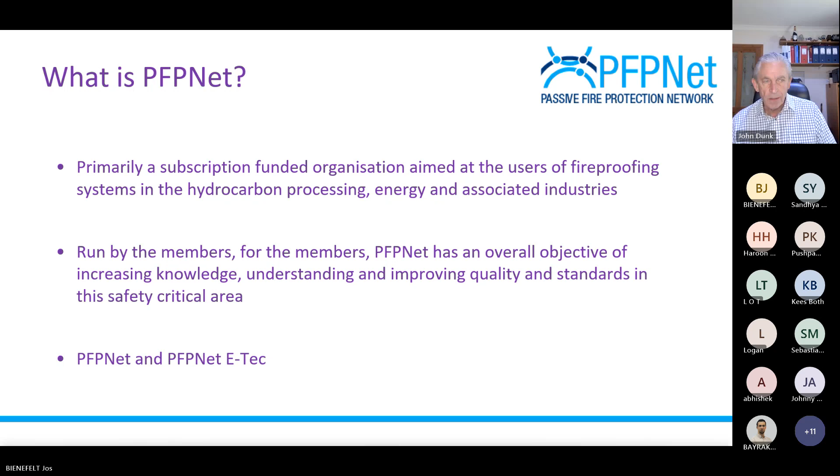Next slide, Jos, please. Recognizing the similarities between tunnel fires and oil and gas fires, primarily due to the severity of them, some time ago PFPNet formed a tunnels fire protection group, currently chaired by Kees Both of ETEX. The group has developed several documents addressing fire protection in tunnels, most recently the guidance document, which we are going to be presenting during this webinar.

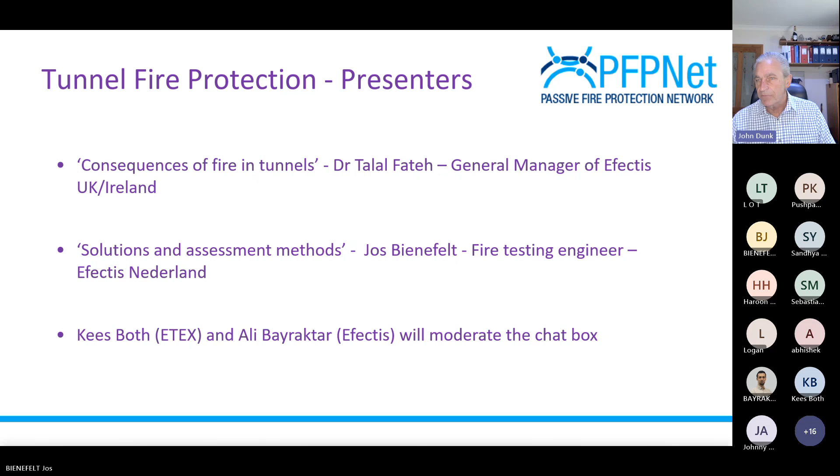Good afternoon, everyone. First of all, I would like to take this opportunity to thank John and PFPNet for the opportunity to present ourselves and also to present our work, the guideline will be presented by my colleague Jos later. To make it very easy, my presentation is very short. It will really be to introduce ourselves and also maybe to have the introduction for the second presentation, so I will not take a lot of time. I will try to do it in 10 minutes to give more time to my colleague and later for the question and discussion all together.

So if we'd like to start. I would like to take this opportunity to present ourselves, Efectis, and the story of this group. 20 years ago, a French research center, the Metallic Construction Institute, with the Dutch Public Research Center TNO, created a private company, named Efectis. This company is really dedicated to fire safety science. At the beginning, we were working to cover the requirements for fire testing, not limited to resistance, reaction, and full-scale tests. Later, the company extended its activity to improve and address the need of the market.

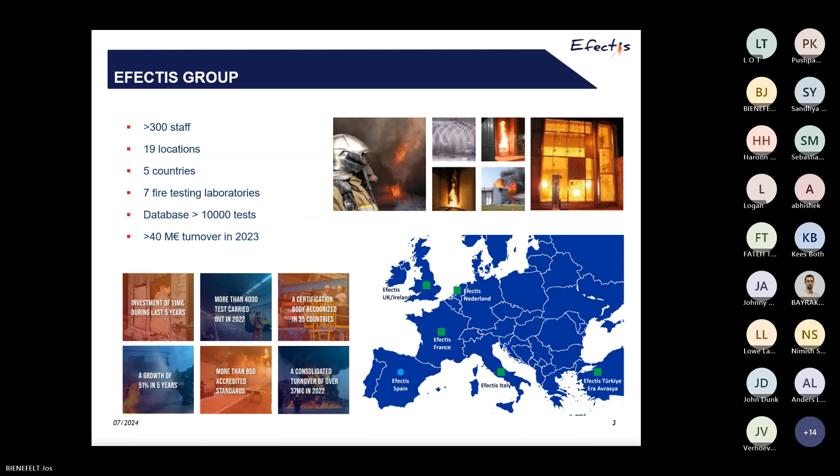How do we work with our clients?

Efectis can work at the product scale to assist the manufacturer to address the need of the market, to trade that product in each country. We are able to provide the CE marking and UKCA and Efectis certified.

It's our voluntary scheme. At the same time, we are able to assist the system in the real application, so what we call project assessment. We are looking at the full scale and the full application of that product or system in a place.

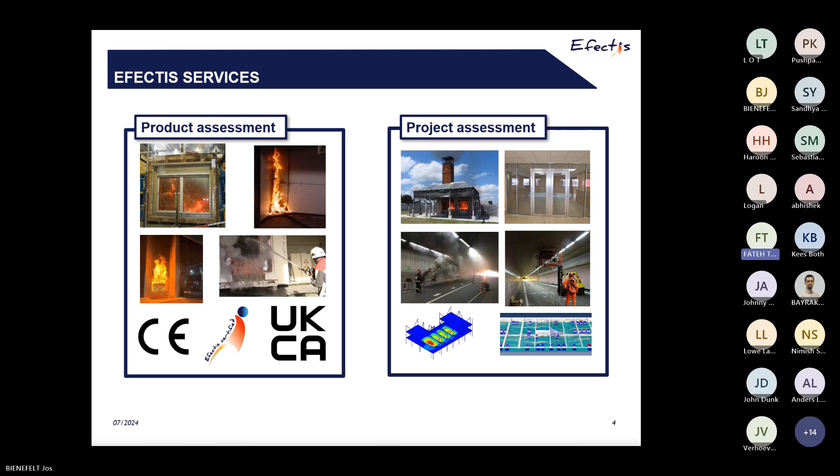As I mentioned, Efectis can cover the requirement for fire testing. So we are able to perform reaction to fire, fire resistance, large scale tests, and also we are able to provide certification, expertise and inspection. And of course we have a lot to do in fire engineering and fire simulation.

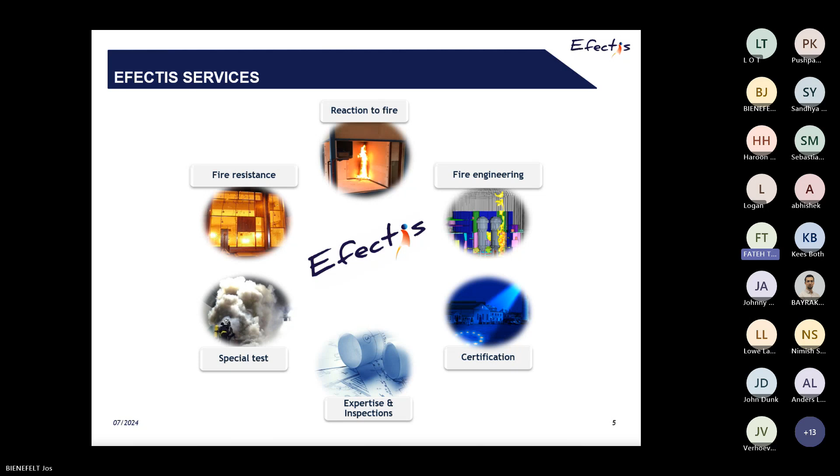Here is the area where we are working. We are covering several sections, not limited to public buildings or high-rise buildings, but also we are massively involved in the nuclear and transport area, infrastructure, and oil and gas.

If we would like to start with our topic today: as you may know, each fire is a specific scenario, so we cannot really investigate by experiment alone each test. But as we are talking today about tunnel fire, let me use the word different, not complex or difficult to understand. Why is it different than other fires?

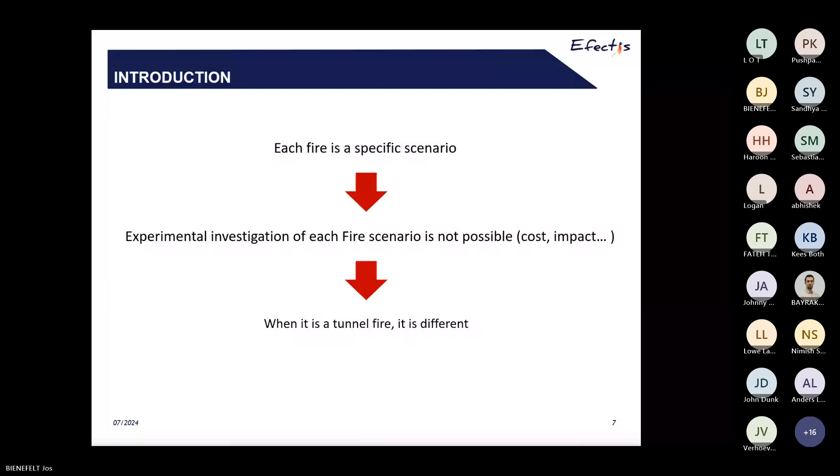Because we have different factors involved in this fire. As you may know, the ventilation is already there in that tunnel, so we are providing oxygen across the time during the fire. The fire can start in different locations, which will change the scenario, and also it changes the damage for that tunnel and the strategy to address that fire.

If we're talking about the fuel load, there is no limitation in the fire in the tunnel. It can be a few megawatts if we are talking about a fire starting with a car, where it can be hundreds or more when we are talking about a truck or maybe petrol tankers.

We can also have what we call a moving fire, if we are talking about a tunnel where the train is running across and we have a fire in that train. And also the tunnel itself has a very specific situation because it has consequences during the accident and also after.

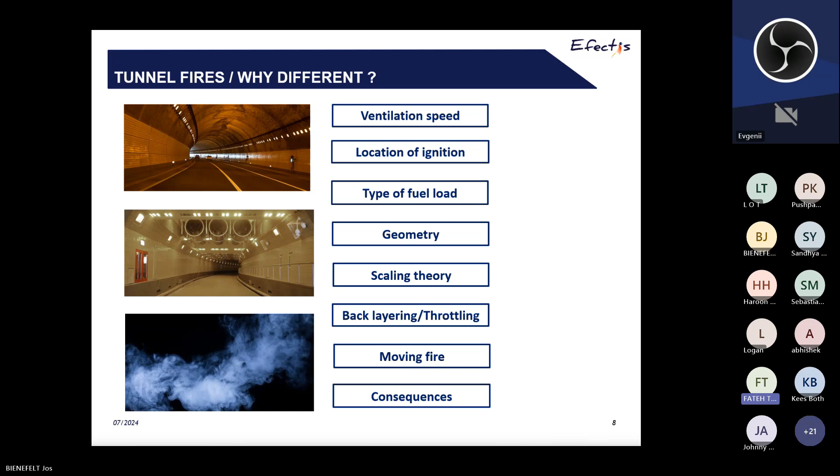So if we'd like to start exploring together what the consequence is after. There is a lot to speak about in this area, but I just take this opportunity to share with you and maybe remind you what impact a fire in the tunnel can have. I will not cover all of them, just a few points quickly as an introduction for the next presentation.

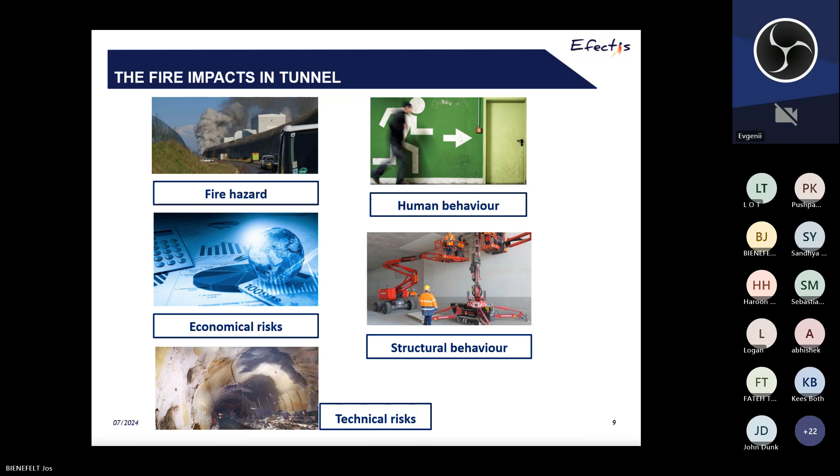If we start with the fire hazard, as you can see in the picture, a fire in the tunnel will generate a large quantity of heat and also a lot of smoke. The smoke has toxicity. We know that we can have different emission gases in that smoke, however we cannot come with the right formulation of that smoke, because the gas can change from one scenario to another, depending on the fuel composition, the ventilation, and all the elements we discussed before together. And also we need to pay attention that we always have the risk of explosion somewhere in that smoke.

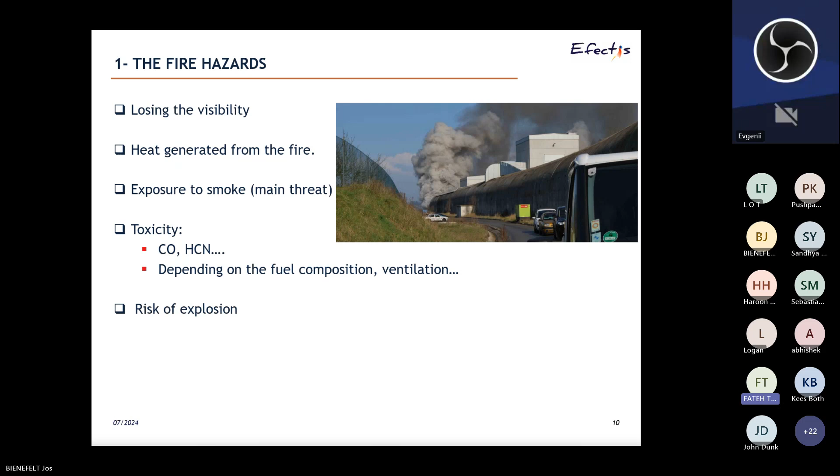Another topic we need to cover when we have a fire in a tunnel is that we need to evacuate a lot of people who may be concerned or impacted by that fire. For some reason, when we are doing training on a normal day or any fire drill, and I believe a lot of us have participated somewhere, somehow, in evacuation training in our buildings, everything happens very smoothly, very quickly, without any problem.

But for some reason, when we are doing that in the tunnel, in the real case, we are acting in a different way than normal. It can be because we are following others, or because we have panic and we don't know exactly what we would like to do at the right time. This can lead to increased evacuation time, and increasing the evacuation time can lead to increased fatality or injury cases in that tunnel accident.

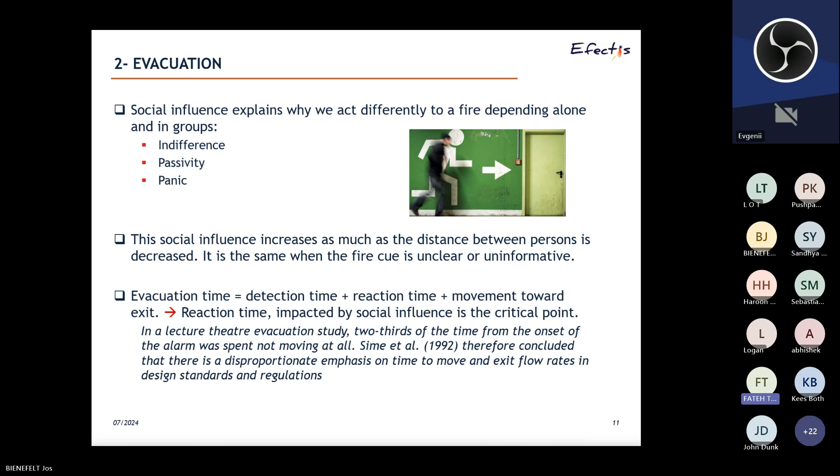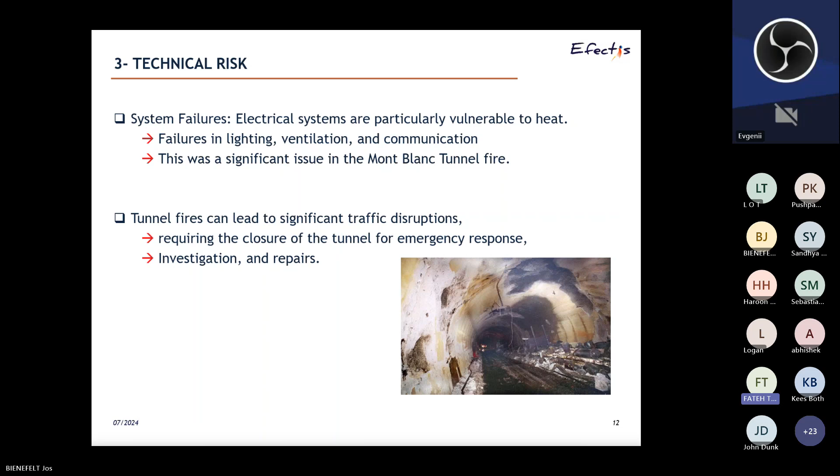Of course, any fire in the tunnel may also lead to failure in the power system. It means that we are losing the lighting, ventilation, or maybe the communication. And also we need to close that tunnel during the accident, and this can lead to traffic disruption. We may need to maintain that closure after for investigation, and maybe for longer time when we would like to have the repair and maintenance before opening that tunnel again.

So again, the real cost for that accident is not only the cost of the maintenance or reparation, but also we need to think about the alternative solution that we need to put in place during that maintenance work. So logistics may raise a lot of extra cost.

And also we should not forget, and we need to pay attention to the pollution that we are causing during that fire - pollution in the air or in the water. And something I would like to bring to the table is that if we have several severe fires in tunnels, we can lose public confidence in the safety of the tunnel and the infrastructure.

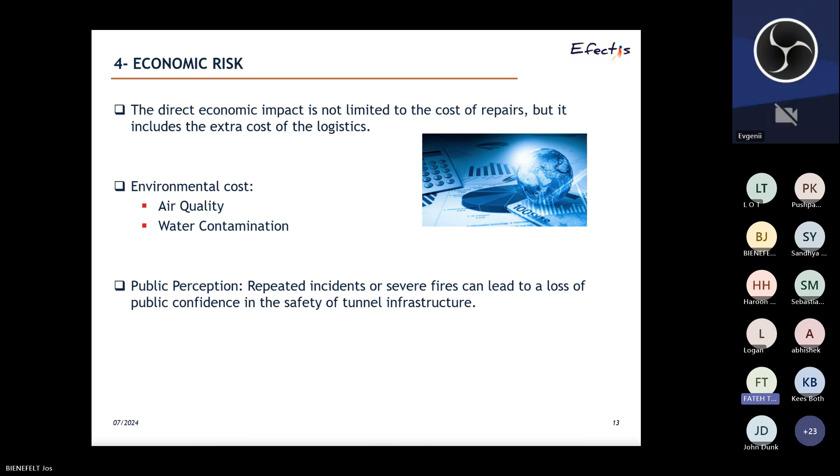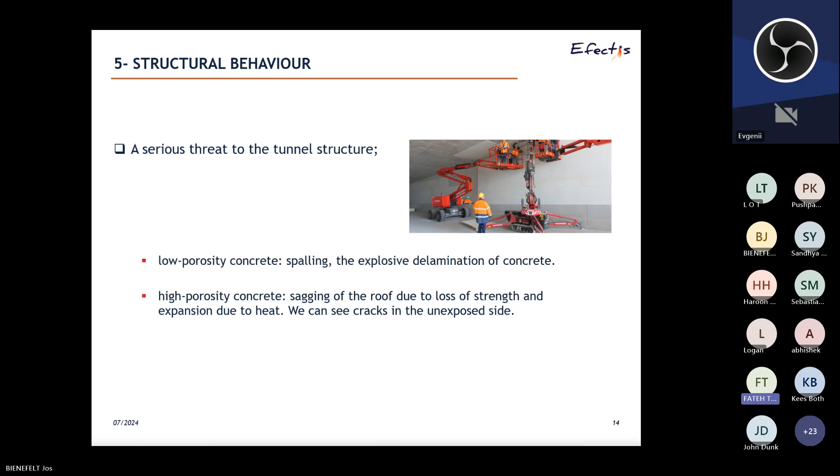So one of the main damages during fire in a tunnel is the damage to the structure. And one of the main structural problems in tunnels exposed to fire is the serious damage caused by explosive spalling of the concrete. So we need to pay attention to how this reacts during the fire.

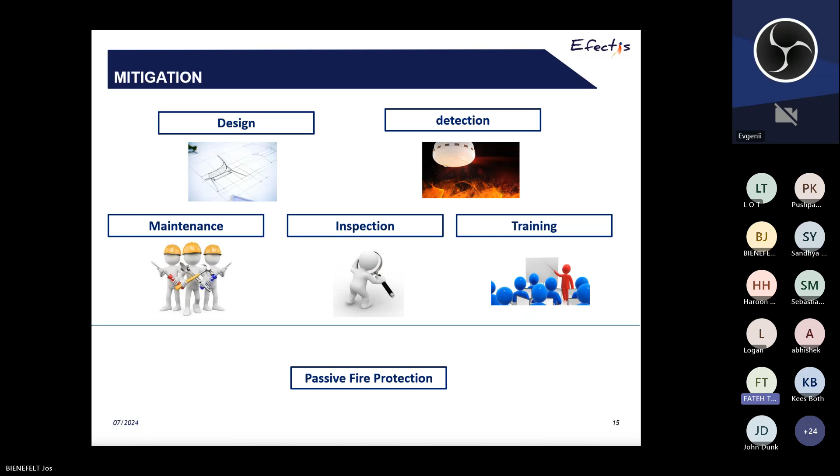So I raised the consequences of the fire, but of course there is a solution - we can mitigate all of this together. How? I just put here a few examples, not reporting everything: good design, early detection, high maintenance, enhanced inspection, training the staff. All of this can help. But of course, as we are talking today about passive fire protection, this can be of assistance.

So using the right passive protection will give us more support for evacuation and firefighting activities. And also, for sure, it will reduce the damage or impact of the fire on the structure and our technical installations. What it means is that we minimize the economic and social impact of that fire, and somehow it means that we extend the design life or cycle life of that tunnel.

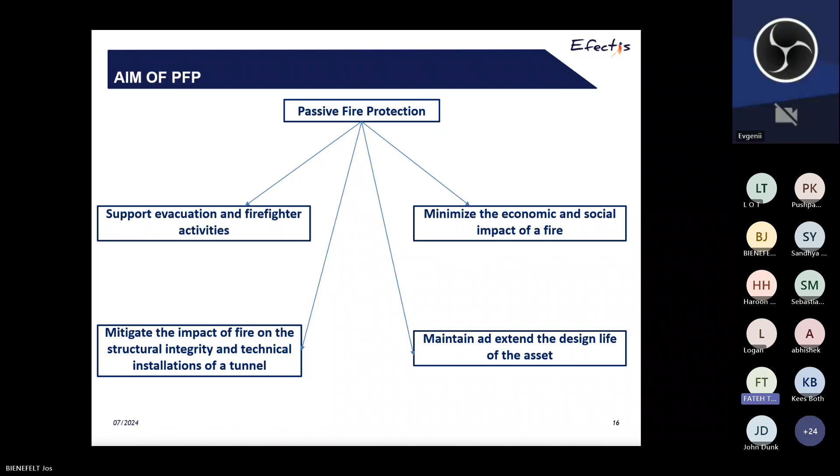Before I close my presentation, I just want to add something to be considered for the future, for next research: today our life is changing. We are using new technology, and this technology may change the risk that we are dealing with, and we need to consider that in any further research activity. So I am just providing two examples: we are using more and more electric cars, and also we start to see hydrogen vehicles or maybe trains and lorries. So we need to think about how it will be in the future.

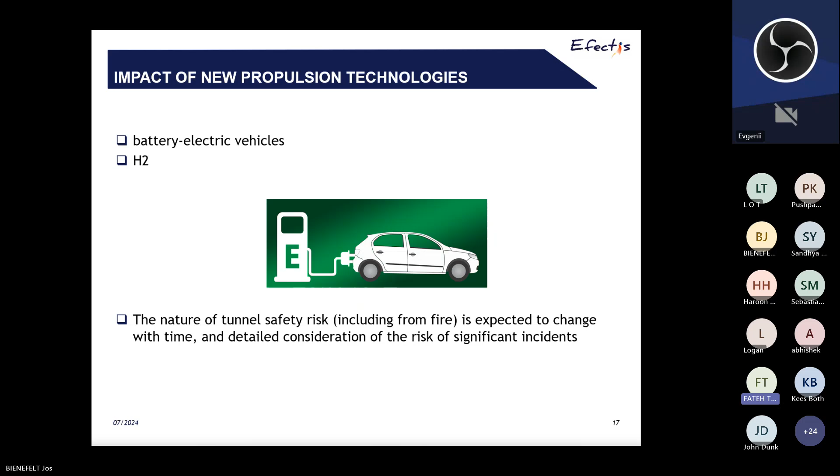I believe I've finished. Thank you very much, and I will leave it there for now. Thanks.

All right, thank you, Talal.

So we will continue with an introduction to the guidance documents on passive fire protection in road tunnels, with the emphasis on solutions and assessment methods.

So my name is Jos Bienefelt, and I work at Efectis as a project leader at the fire engineering department. My main involvement is in fire resistance of concrete structures, tunnels, protection of concrete structures. I'm a co-author and editor of the Efectis R0695 procedure for testing of tunnel lining. I'm also a co-author of the PFP-Net guidance document. Here you can find my email and telephone number.

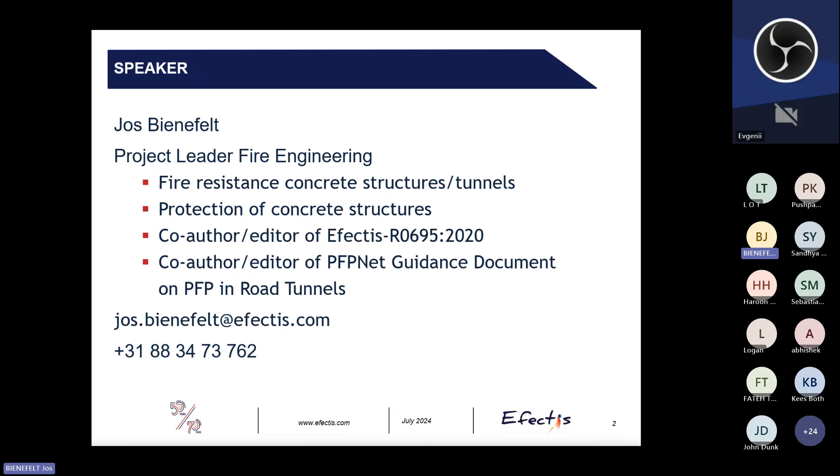So the intent of the guidance document is to give a primer for those who are not familiar with PFP in road tunnels. Why is PFP-Net interested? Well, John already mentioned it - tunnel fires are severe and akin to the industrial fires that other PFPNet members are familiar with, and also the hazards are becoming more similar.

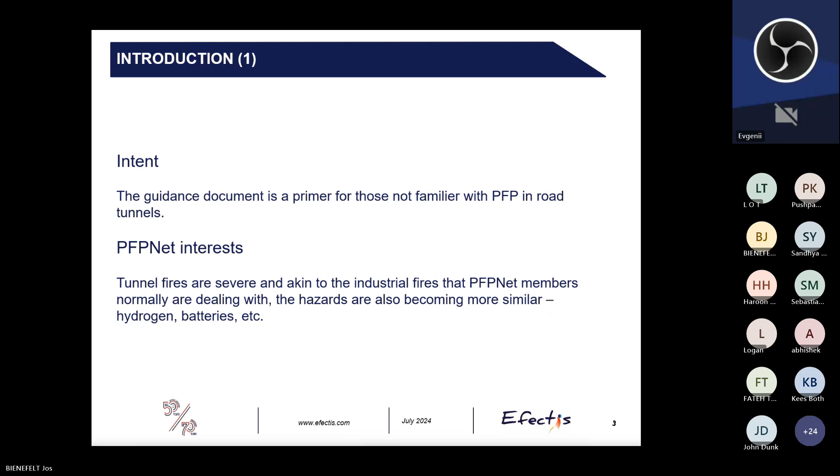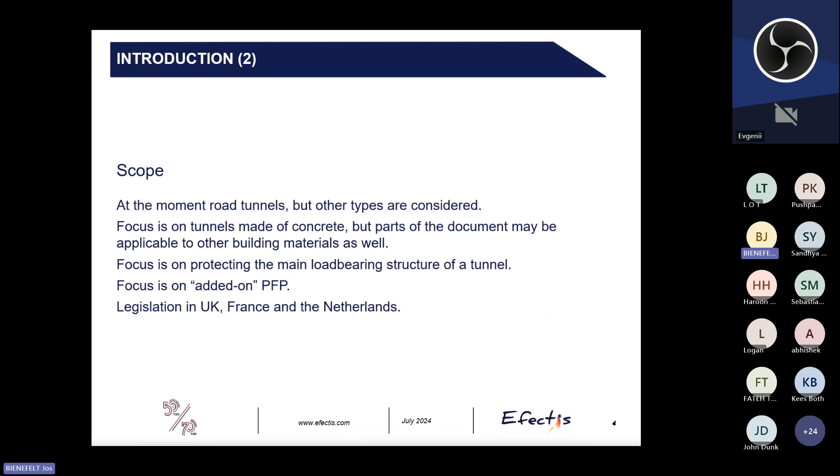So the scope of the guidance document is the following. At the moment, only road tunnels are considered, but other types are also under consideration, for instance, rail tunnels. The focus is mainly on tunnels made of concrete, but parts of the document may also be applicable to other building materials. The focus is also mainly on the load-bearing structure of a tunnel and added PFP. And only legislation from the UK, France, and the Netherlands is included.

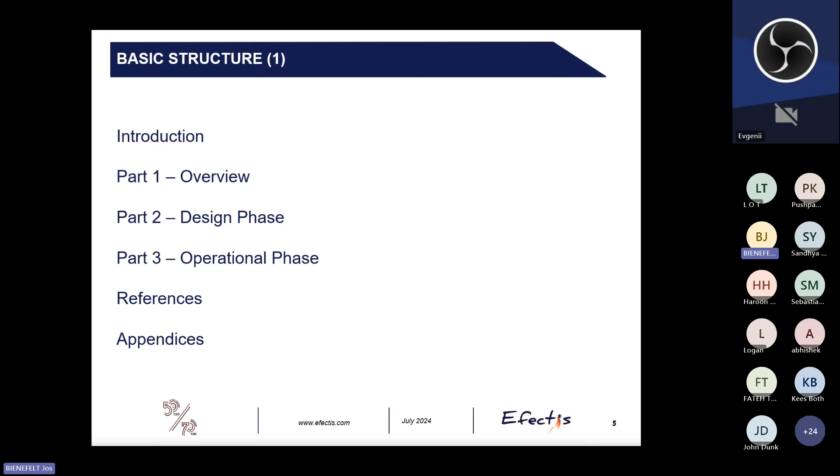The guidance document is divided into 3 parts. The first part is an overview. In the second part, the design phase is discussed, and the third part covers the operational phase.

In part 1, the overview, the steps necessary to implement PFP in road tunnels are given, along with a discussion of major incidents that happened in the past. A high-level implementation chart is given, examples of PFP, and it also discusses alternatives to PFP. Active fire protection is also discussed with an emphasis on fixed firefighting systems.

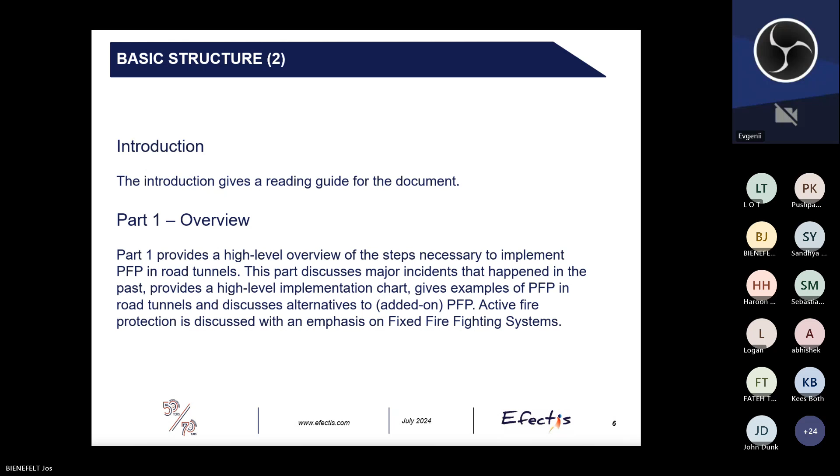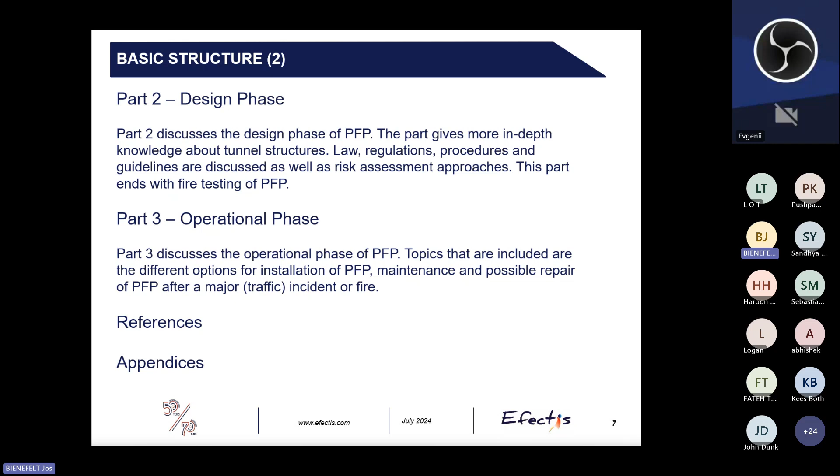In part 2 of the document, the design phase is discussed, giving a more in-depth overview of tunnel structures, regulations, procedures, and guidelines, as well as risk assessment approaches. This part ends with fire testing of PFP. In the third part, the operational phase is discussed, which includes installation of passive fire protection, maintenance, and possible repair.

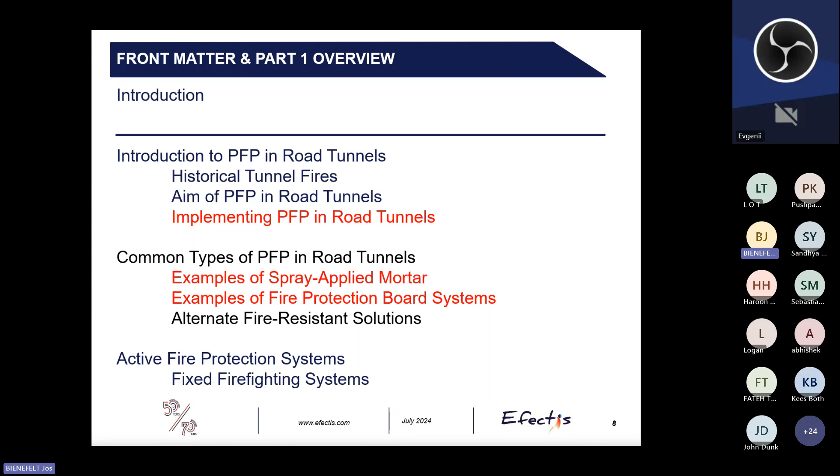So for this webinar, we will discuss implementing PFP and give some examples from part 1.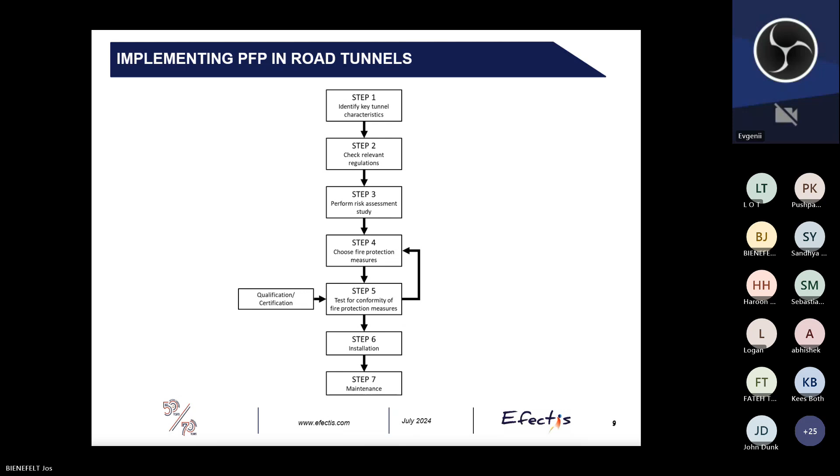Now we will discuss some common types of passive fire protection in road tunnels. There are actually 2 common types: the first one is spray applied mortar, and the second one is based on fire-resistant boards. At the time of writing this document, intumescent coatings are not in use, or at least I'm not aware that they are in use in concrete tunnel structures, but I also know that some developments are being made.

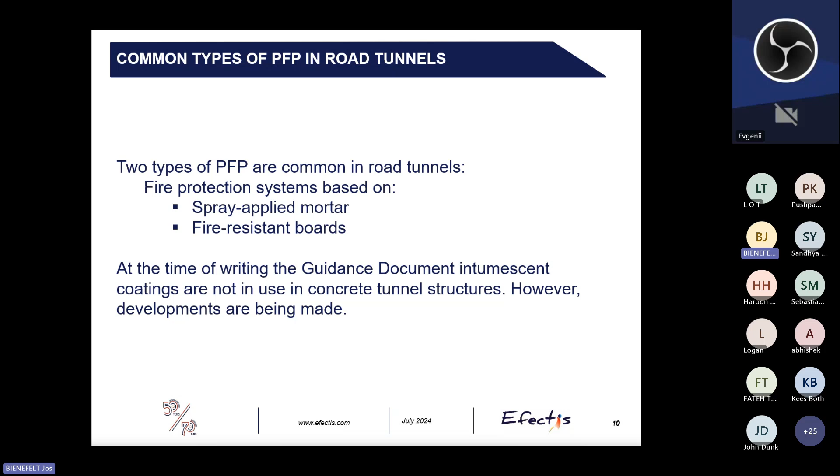Let's start off with an example of spray applied mortar. In this picture, it's shown that spray applied mortar is applied to the ceiling, to the beams, but also to the wall. What we see on the ceiling is the surface that you get after applying spray applied mortar, which is a quite rough surface. But on the wall, the spray applied mortar is troweled to cut down the unevenness and to give it a smooth, appealing surface. And the wall is also painted.

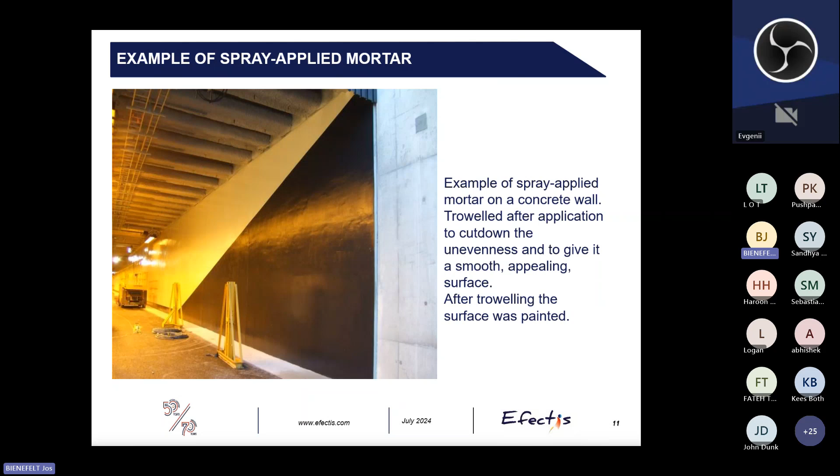Next up are examples of fire-resistant board systems, starting with a post-fixed fire protection board system. With post-fixed, we mean that the system is installed after casting of the concrete structure. Sometimes fire protection boards are cast with the concrete, and in that case we refer to it as a prefixed system. This particular system has the back of the boards in contact with the underlying concrete, and the boards are fixed with nail anchors, simply butted against each other at the joints.

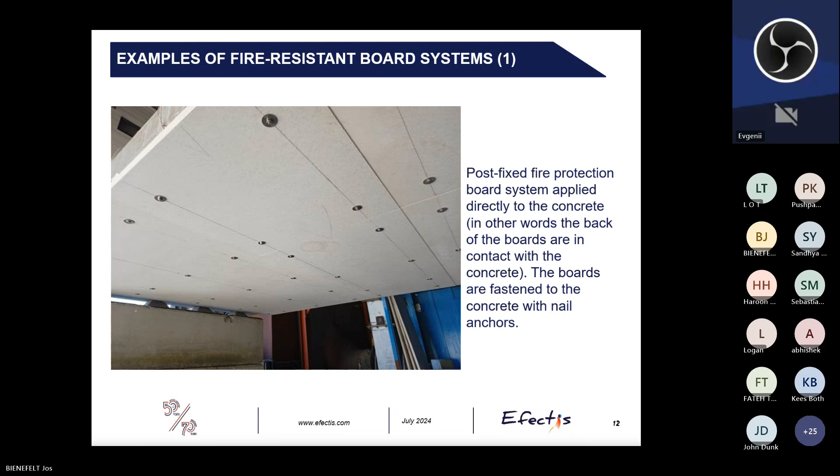Such a system can also be painted to make it more appealing. One of the disadvantages of the first system that I've shown, with the butted joints, is that high temperatures may develop at the joints, and these high temperatures may induce fire-induced spalling prematurely.

So to get rid of that, sometimes strips are used to cover the joints. In the left picture, front strips are used, installed at the side, at the tunnel side. In the right picture, backer or backing strips are used, installed behind the main boards. There's a difference between these two systems: in the left system, the entire board is in contact with the underlying concrete, while in the right, the back of the boards are not in direct contact with the concrete, and that may have an influence on the behavior of the system.

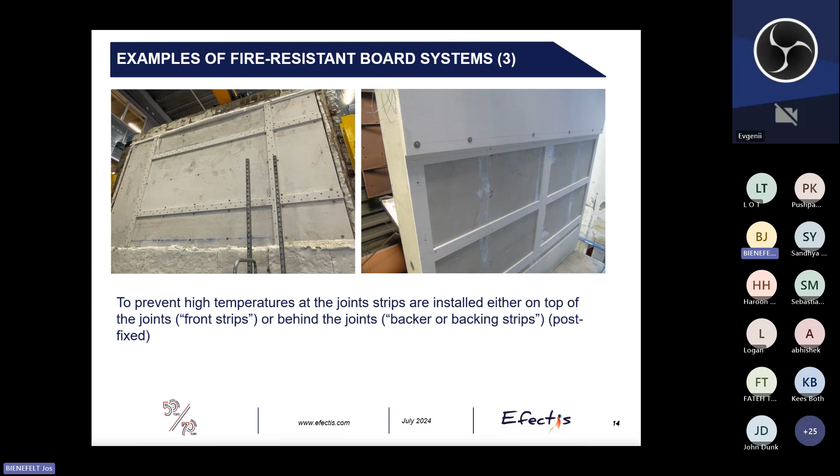Board systems may also be used to protect bored tunnel segments, which are used with TBM tunnels. In this case, a faceted system is used, and the system is also placed on backing strips. Again, there is a void behind these boards, so these boards are not in direct contact with the concrete.

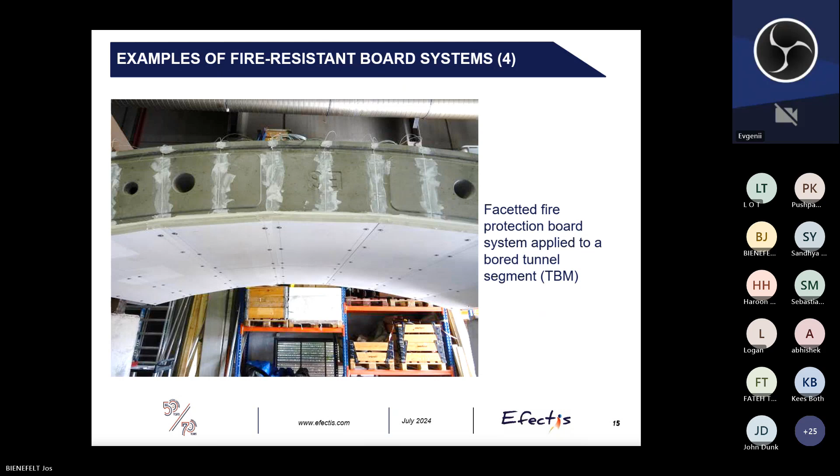Another variation on the board systems is a system installed to a steel structure. In this case, the boards are again not in direct contact with anything at the back, and sometimes that means these boards have to be thicker to make them structurally sound during fire.

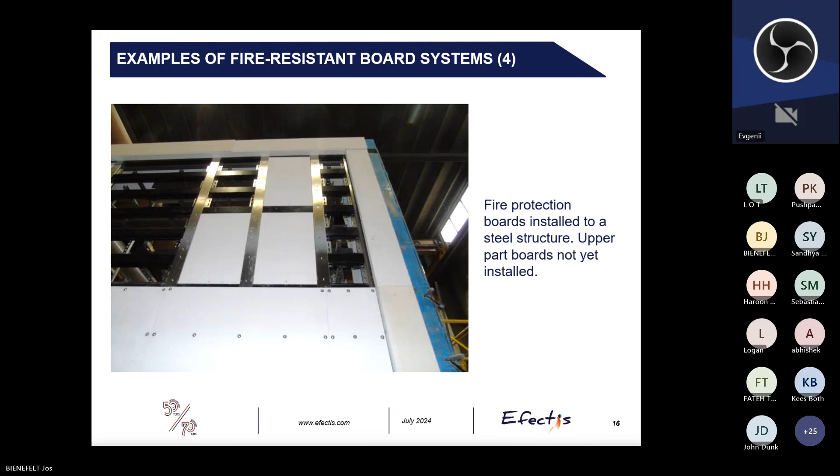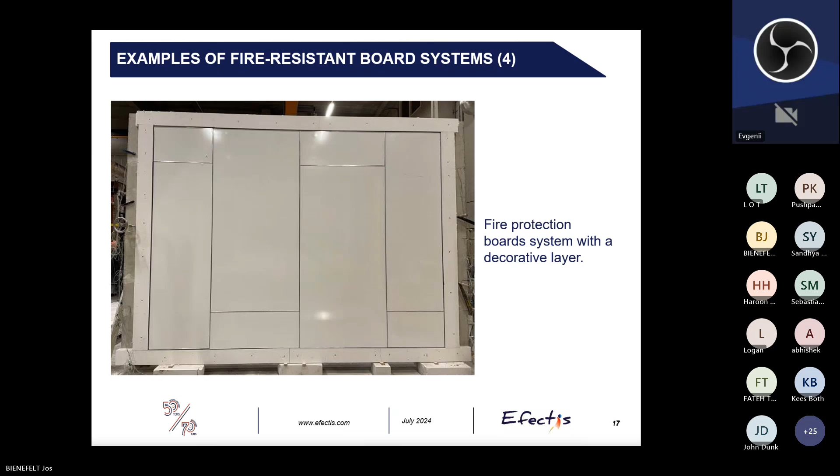Continuing with part 2, the design phase. From this part, we will only discuss testing of passive fire protection systems.

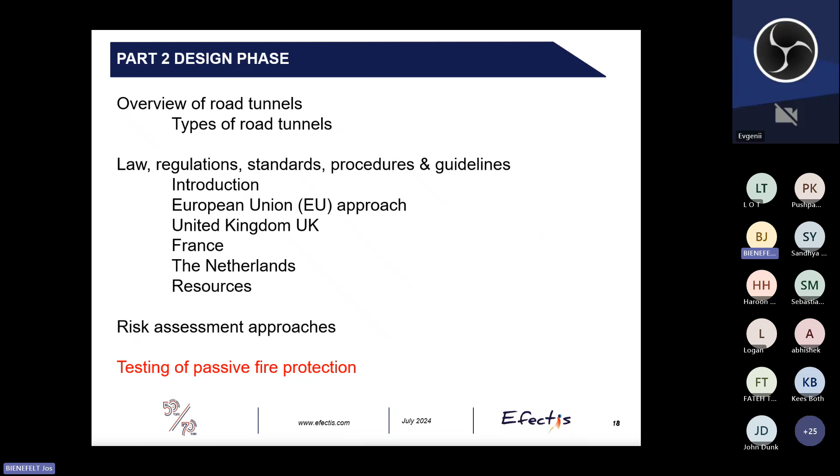Testing may be divided into reaction to fire tests, whose results are mainly applicable to the beginning stages of a fire; fire resistance tests; and other tests such as freeze-thaw cycle tests, fluctuating air pressure tests, and tests to check resistance against chemically aggressive environments.

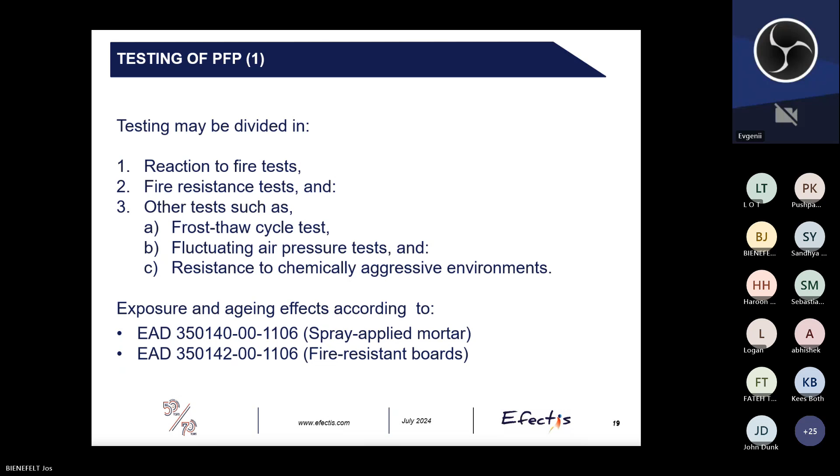Exposure and aging tests are mentioned in these EAD documents. On the European level, no harmonized fire resistance testing standards or classification systems exist for PFP in road tunnels, for testing at the high temperatures expected in the most severe tunnel fires. Every country within the EU arranges this on a national level, and the guidance document describes the procedures for France and the Netherlands. There's no specific UK procedure at the moment.

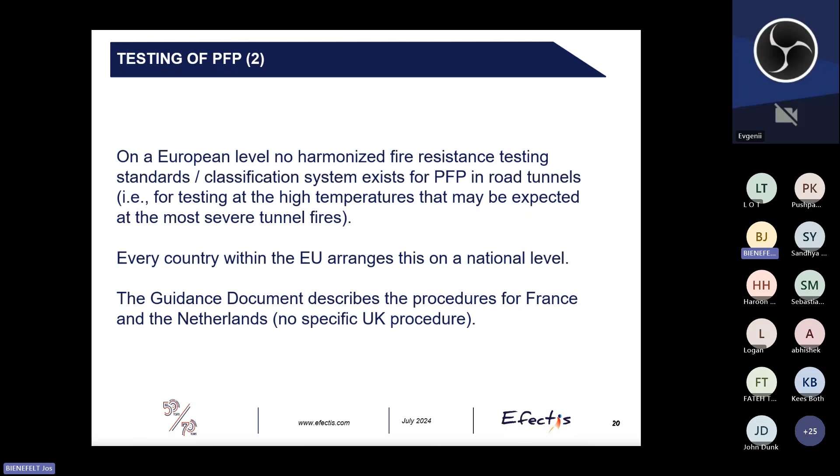Before continuing with testing, we will first look at some fire curves used in these tests. Let's first have a look at the ISO 834 standard fire curve, which is actually a fire curve used in buildings.

If you compare this fire curve to a common tunnel fire curve, for instance the RWS fire curve, we see that the temperatures in the RWS curve are much higher, with a peak of 1350 degrees Celsius at 1 hour. What's also of interest is that tunnel fire curves have a much higher rise in temperature in the beginning stages - for instance, the RWS fire curve reaches 1100 degrees Celsius in 5 minutes. This may influence the behavior of the concrete tunnel structure: with such a rapid increase in temperature, it's more likely you will have fire-induced spalling of the structure.

Some other curves: the RWS fire curve is used in the Netherlands but also worldwide. The HCM fire curve is used in France, and the RABT fire curves are also used in Germany.

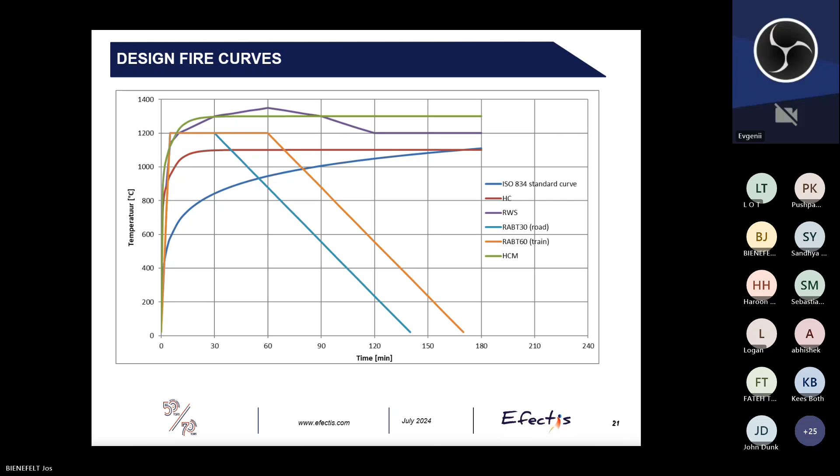Continuing with PFP in France: the PFP should have a European classification A2 S1 D0. For determining the fire resistance, CETU has published a guide called Passive Fire Protection Systems - Justification of Performance for Road Tunnel Structures, which is freely downloadable from the CETU website.

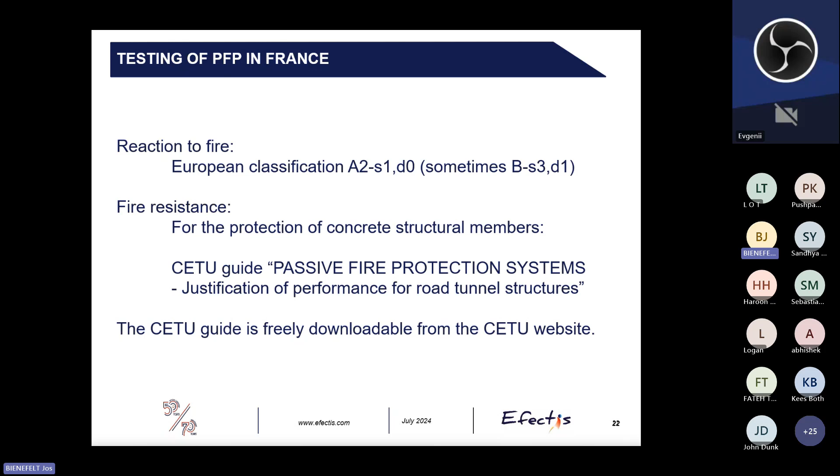In the CETU guide, a test is described that's based on the European test standard EN 13381-3, but the CETU guide substitutes the standard fire curve for a different one and describes more instrumentation than the European test standard. What's worth mentioning is that the CETU guide only describes a method to determine the characteristics of passive fire protection - spalling properties of the concrete structure are not considered in the CETU guide.

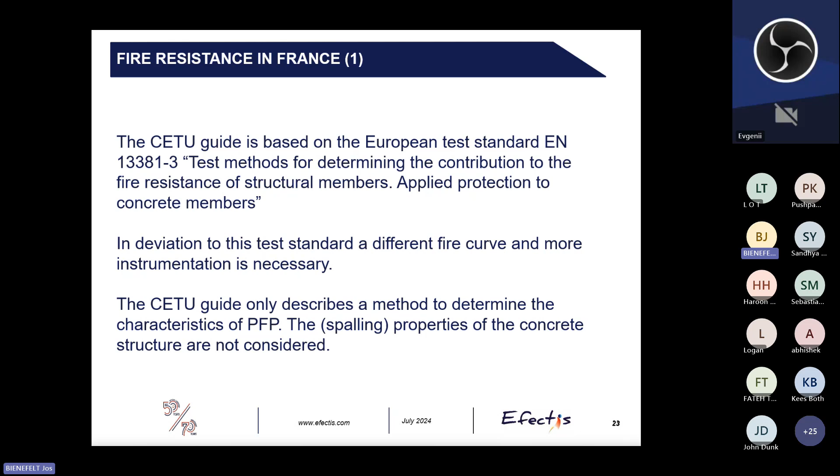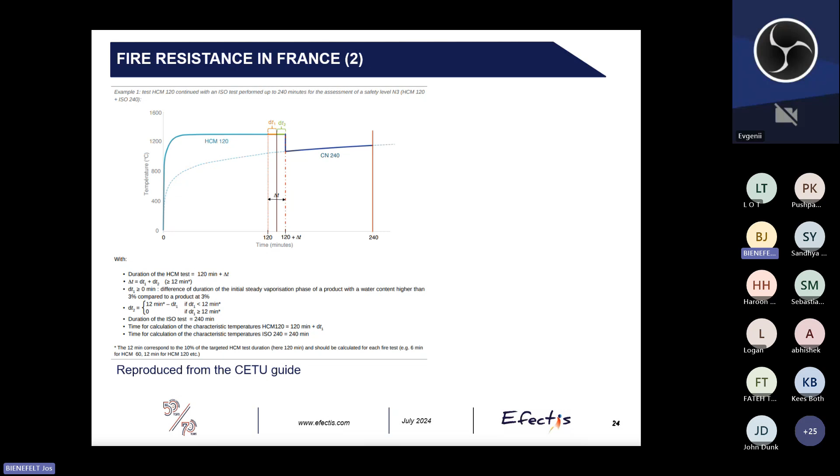Worth mentioning is that for these tests, a tensile stress in the reinforcement bars is induced. That differs from the Dutch case, which we see later, wherein a compressive stress is induced at the heated side. Compressive stresses usually have a negative influence on the spalling behavior of concrete. So no furnace pressure criterion in this case, and structural failure of the PFP system is not allowed.

The fire resistance criterion is defined as a maximum characteristic temperature on the exposed surface of the concrete, given in the technical specifications of the project. The definition of this characteristic temperature is taken from the EN standard, but it differs from the Dutch case, from the Efectis R0695 case.

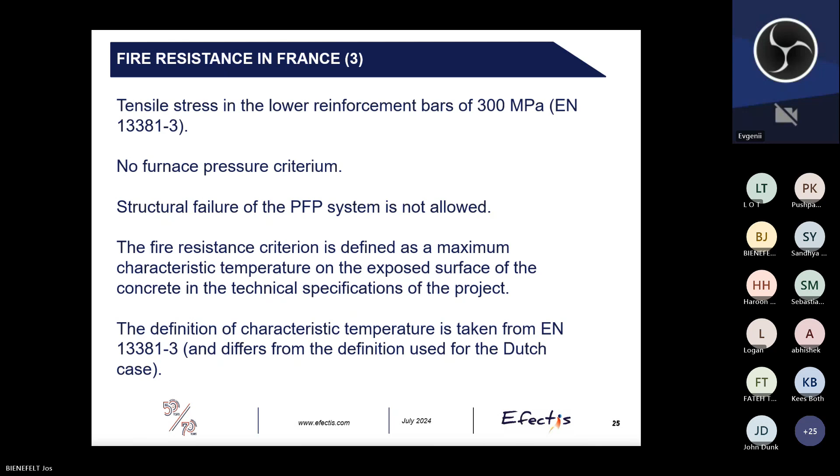Continuing with PFP in the Netherlands. In the Netherlands, a PFP system should have a B, s2-d2 classification as a minimum, and for determining the fire resistance, Efectis R0695 is used. The latest version is the 2020 version, and this is again freely downloadable.

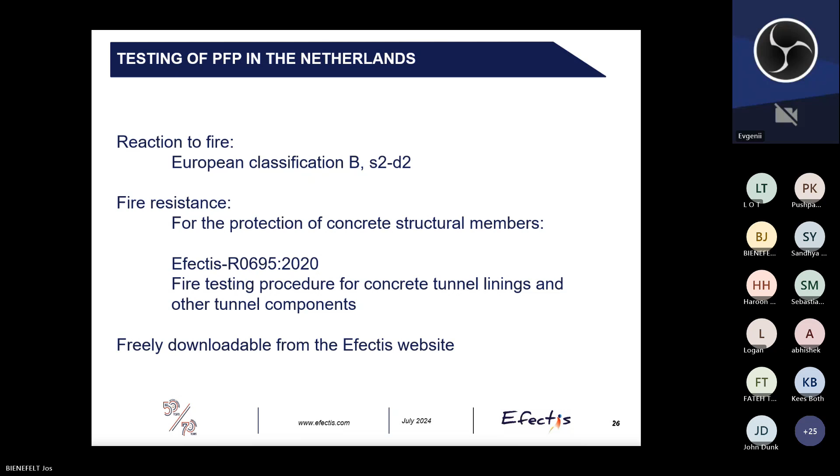This procedure describes two kinds of tests: a spalling test and a thermal insulation test. A spalling test is normally a project-specific test in which a representative concrete structure is also made part of the test. Such a structure may be either unprotected or protected with a fire protection system. At the thermal insulation test, only the fire resistant properties of a fire protection system are considered, so spalling does not play a role in this type of test.

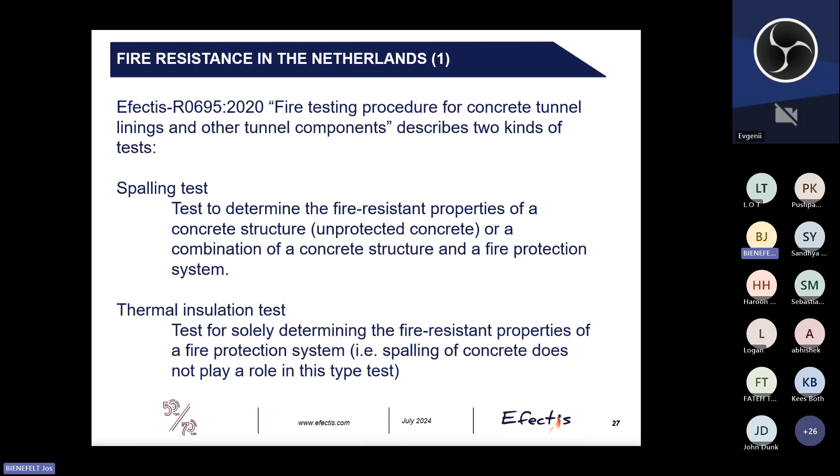When looking at the spalling test, a heated area of a minimum of 5 square meters is required for unprotected concrete and 8 square meters for protected concrete, so concrete protected with a PFP system. The thickness of the concrete slab or lining should be the same as in practice, or may be limited to 40 centimeters.

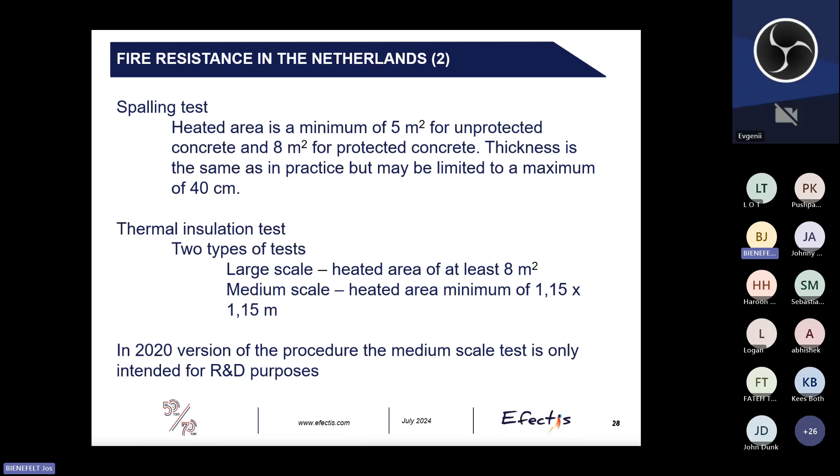The thermal insulation test is actually divided again into two different tests, a large scale and a medium scale test. The large scale test has a heated area of at least 8 square meters, and the medium scale test has a heated area of a minimum of 1.15 by 1.15 meters. In the 2020 version of the procedure, the medium scale tests may only be used for R&D purposes.

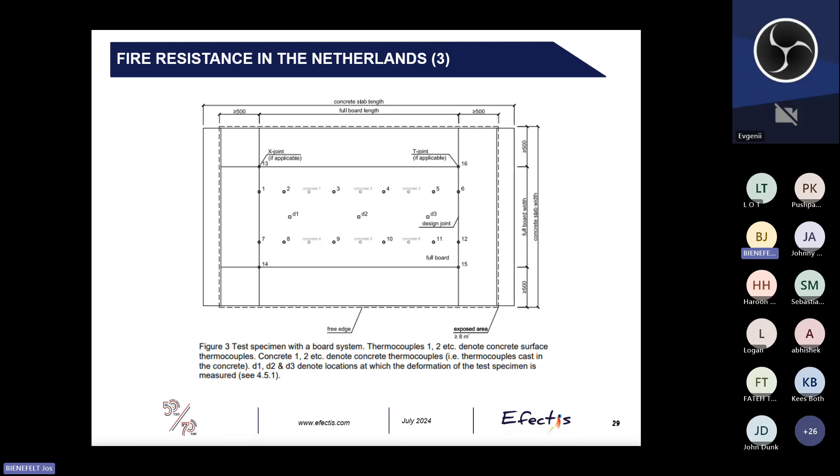For the spalling test, a compressive stress level should be maintained which is representative of the conditions in the tunnel, because those have a negative influence on the spalling behavior of the concrete. But also the concrete mix, reinforcement, etc. should be representative of the actual situation. For the thermal insulation test, only the thermal properties of concrete are considered. In this case, there is a furnace pressure criterion of 50 pascals, and again structural failure of the PFP system is not allowed.

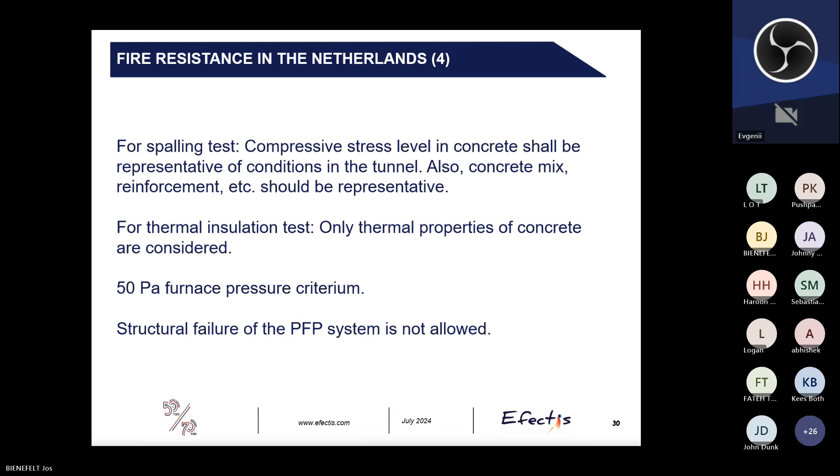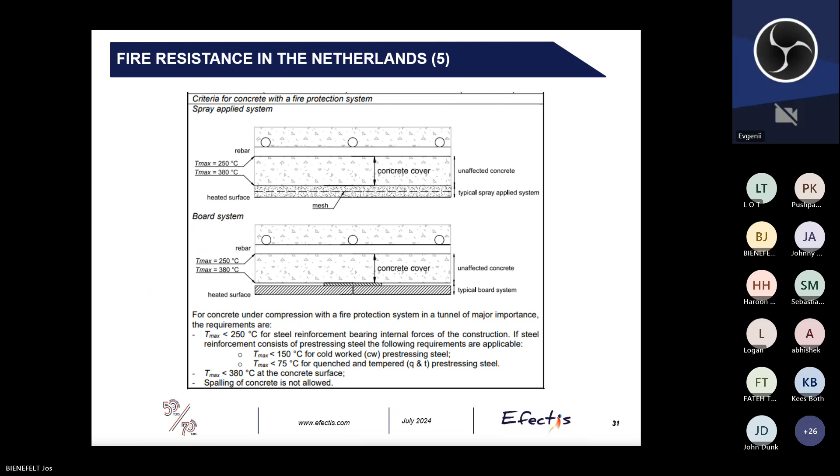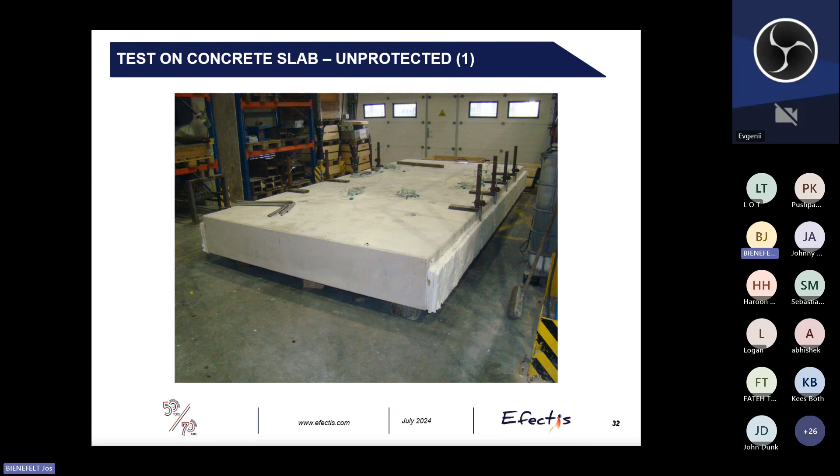Next up is an example of a test on a concrete slab, in this case an unprotected concrete slab, so no PFP was installed. This slab has a length of 5 meters and a width of 2.4 meters and a thickness of 40 centimeters. The heated area had dimensions of 4 meters by 2.4 meters, and the slab was only supported at the ends.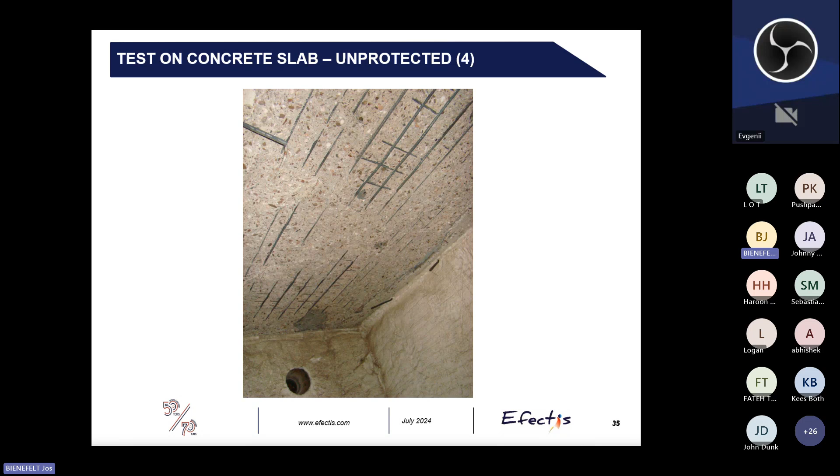This is the result after 25 minutes of the RWS fire curve. Spalling in this case was so severe that we had to stop the test prematurely. This test actually had to run for 2 hours. So this is again a picture giving an overview of the amount of spalling.

And this picture gives a more detailed view of the surface. You can actually see here that spalling was so severe that it's actually behind the first reinforcement layer. This particular sample had a concrete cover of 70 millimeters. So with this test, we've lost in 25 minutes at least 70 millimeters, and at some locations even more.

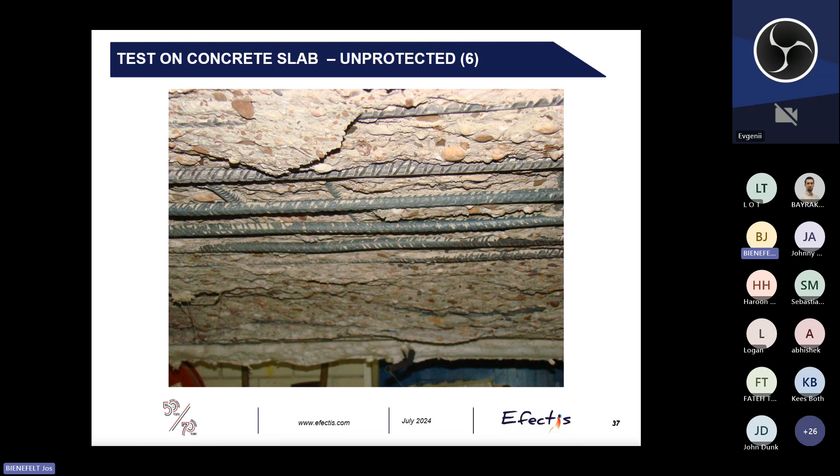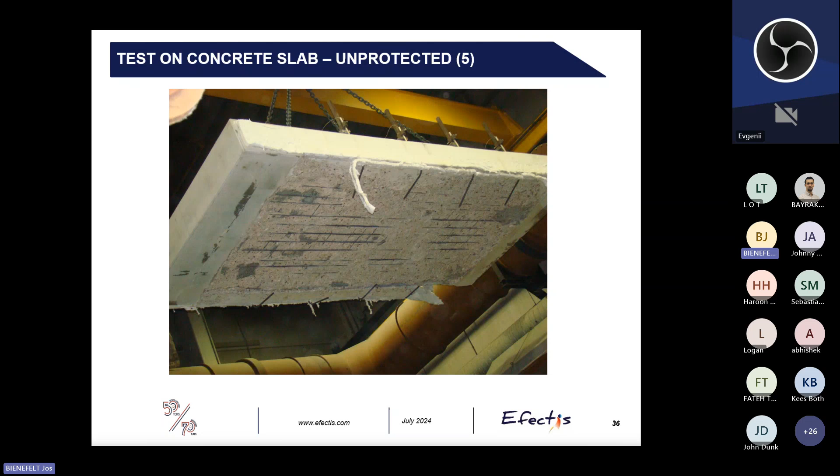So this test really shows that if you have concrete that you test with a high temperature fire curve, as the one you would expect in a tunnel, spalling might be so severe that your actual structure will be, let's say, eaten up by the fire. So this specimen definitely needed to be protected by a passive fire protection system to mitigate that. And this is a picture from inside the furnace showing how much concrete came off in 25 minutes time.

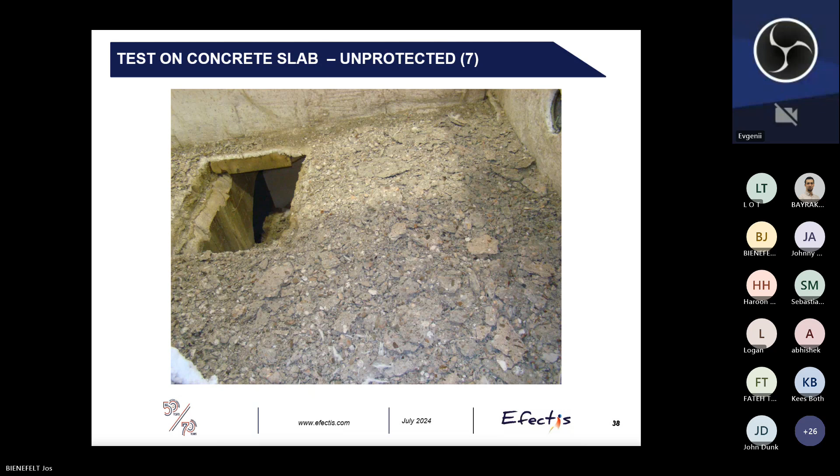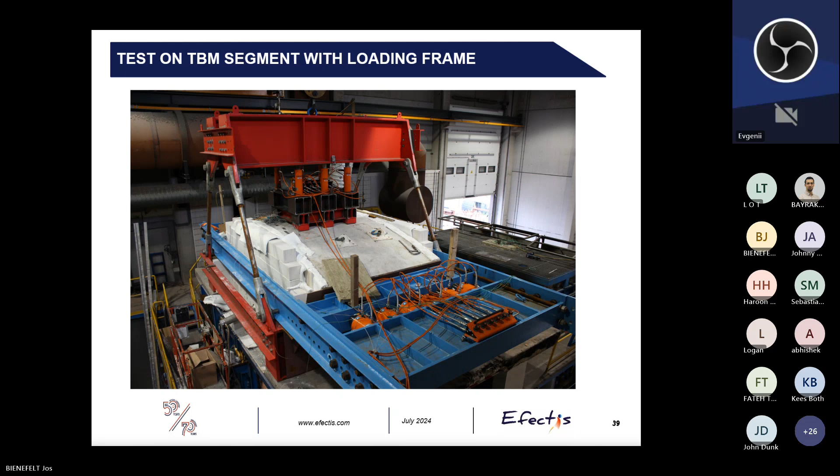Sometimes it's not possible to perform a test at our lab, and then we can go with our mobile furnace to the actual concrete tunnel structure. So for that reason, Efectis developed a mobile furnace. We have called it MobiFire, and we can perform tests on the wall or the ceiling of an actual tunnel.

So the mobile furnace has a heated area of 1 by 1 meter and is able to reach the high temperatures of all the fire curves that we've seen before. So also the RWS fire curve, which goes in 5 minutes to 1100 degrees Celsius. So the mobile furnace is not only limited to tunnels, but we can use it at other sites as well.

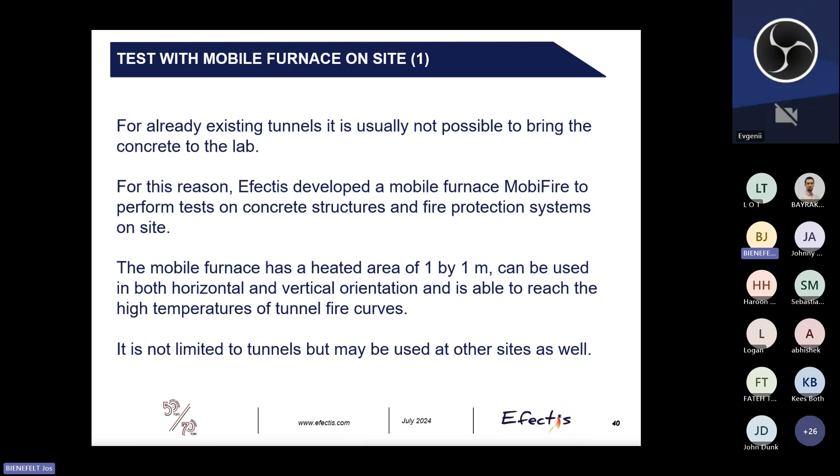So maybe to get a bit of a closer view, this is a test on the wall. And you can see here that the mobile furnace is a self-contained unit.

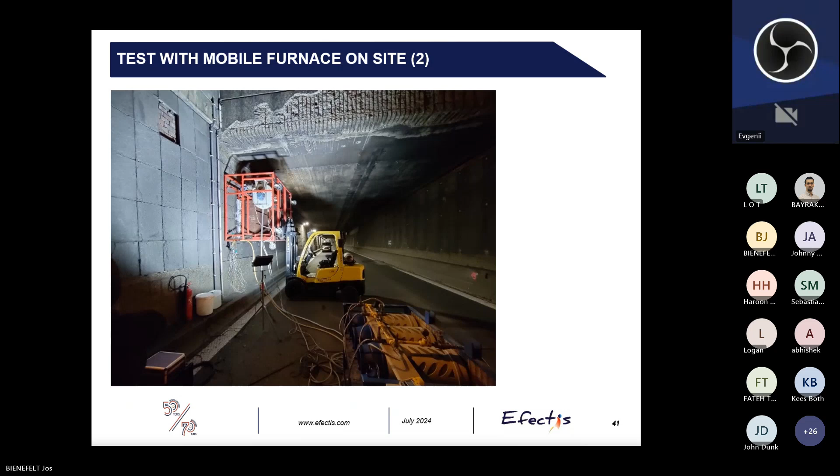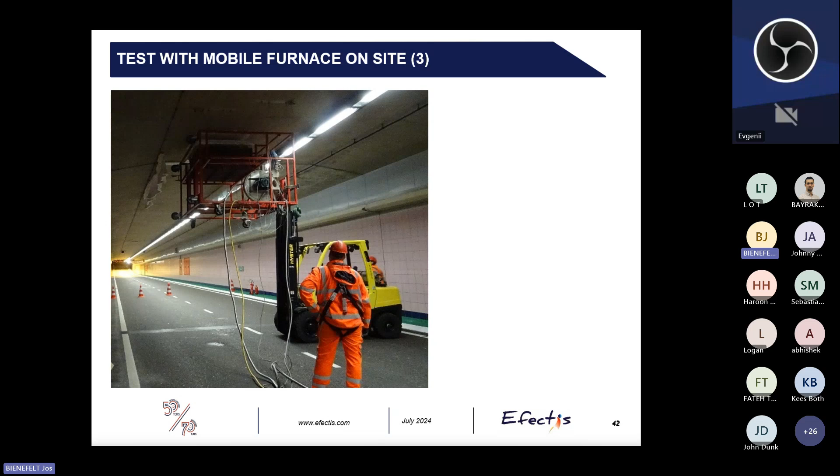So from part 3 of the guidance document, we will not discuss any topic, but you may read that if you want to in the guidance document.

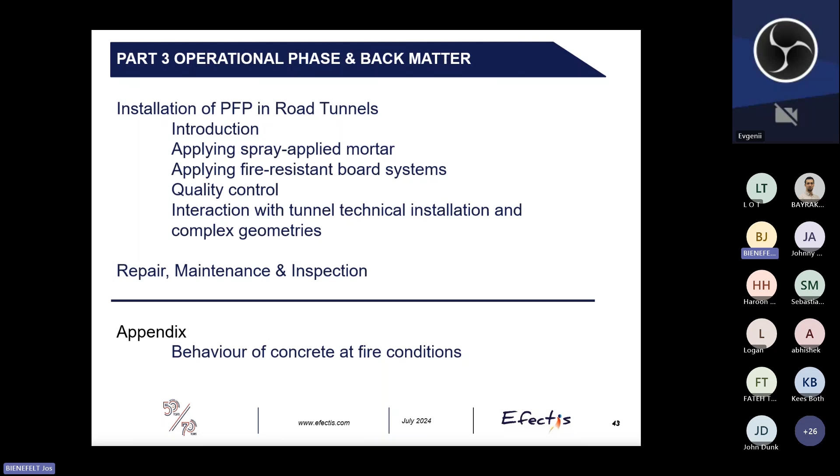Thank you, Jos. And we have a number of questions in the chat. I'll try and summarize it. Basically, 2 people have posed questions, but for those of you on the call who are inspired to ask additional ones, we do have almost 20 minutes for Q&A, so please think about it. First question is from Nimish. I hope I pronounce it correctly. Basically, it's 3 questions, and maybe to start with the first one.

EV fires in tunnels will have multiple mini blast effects, I assume. Has Efectis made a fire test regime to test blast resistance in combination with fire?

No, I think maybe Talal can also comment on this, but at this moment that is not something that we have done research into. And we also have not made a specific fire curve or designed a specific test to see if that might be a problem with the concrete tunnel structures used. That's the case for the Netherlands. Maybe Talal, you can comment. Maybe you've done it in the UK.